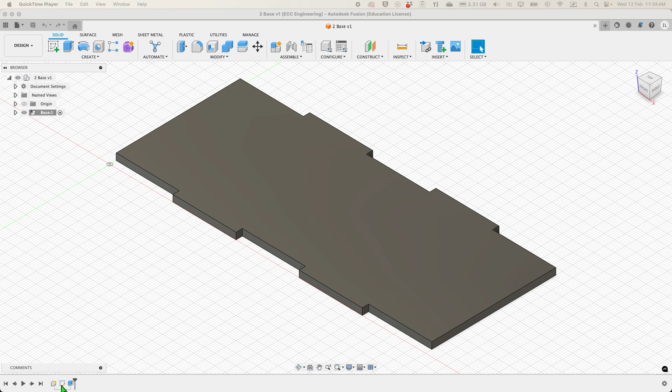But for now, I'm going to put in the drawings in the sketch for a captive nut T-joint, right? So we're not going to create a new sketch because it's going to go on the existing sketch that we have done. So I'm going to go at the bottom here where we have our events, the event browser. Right click on that and click Edit Sketch.

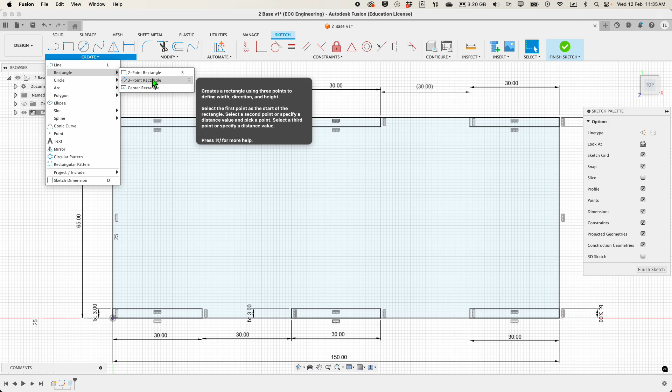And you come back to where we have done our sketch. So the system loads up the sketch onto the window. This looks exactly like what we had done in the previous video. All right, so now we're going to go to Create, and we're going to go Rectangle. And this time around, we're going to choose a 3-point rectangle.

Move the mouse to this edge here and slide along the edge, and the part where it suddenly hits an X with a triangle on it, then you know that it's hit the center. So you're going to click it once and just slide the mouse a little bit across and then type in 3.1. Click once, slide the mouse to the top, and then we're going to type in 8 followed by enter.

All right. So what's happened then is that it has created a rectangle with a height of 8 and the width is 3.1. Why 3.1? Because eventually we're going to put in a bolt that is 3 millimeters in diameter into this opening. And a 3.1 just gives a 0.1 of a tolerance to allow the bolt to go in without scraping against the sides.

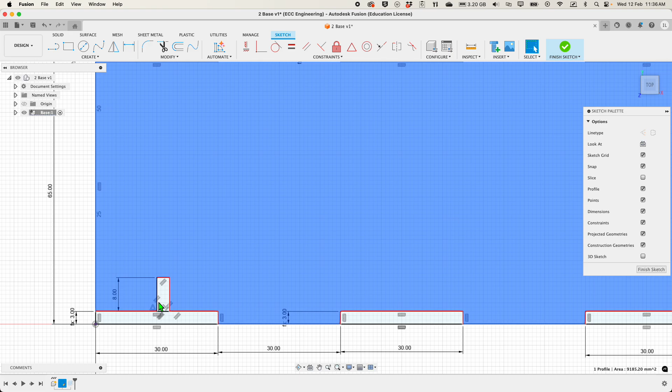All right, I'm going to zoom in now to this section here. And now we're going to create rectangle, and we're now going to do a center rectangle. Right. So again, slide down the top. Now, when you get to the center, again, it shows you with the triangle. Do not click the mouse. Just move the mouse down.

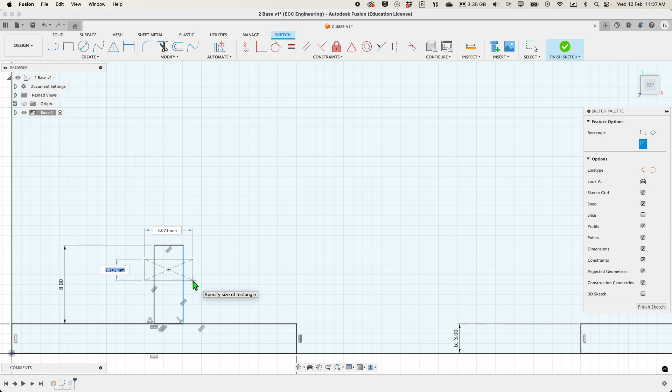So you can see that it is holding the position that it's still at the center, right? You can see the dotted lines come down, but it hasn't quite locked in the position yet. And so we're going to lock in the position just a little bit further down, making sure that the dotted lines are still there. So click once to lock in the position, and then move the mouse out. We're going to type the height as 2.5 and tab, and the width is 5.5, enter. So this is where the nut goes for the captive nut joint.

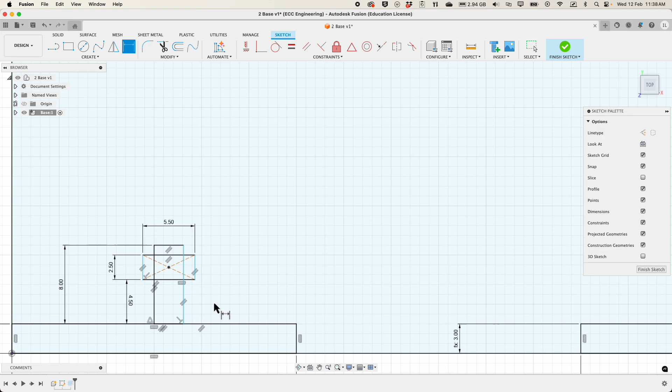Dimension that from the bottom edge to there, and that's going to be a 4.5, enter. All right, we're going to repeat this process again a further 6 times. And I'm probably going to do that really quick just to make things go along a little bit faster.

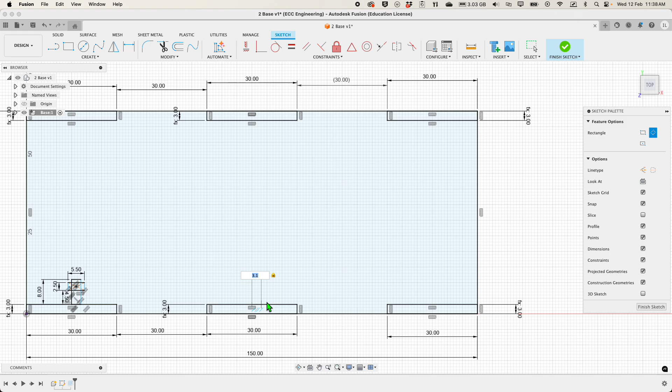Rectangle, 3-point rectangle. I'm just going to slide up to there. Click once. And obviously that's got to be 3.1. Click again. Up 8. Enter. And then we're going to go with create rectangle, center rectangle, and just zooming in a little bit down.

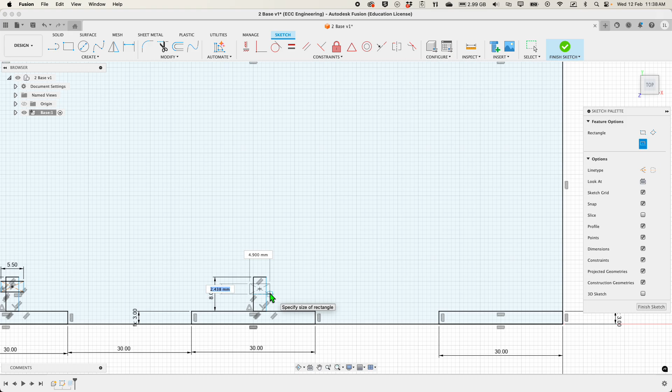2.5, tab, 5.5, enter, and let's dimension that bottom to there, and that's going to be 4.5, enter. Alright, let's repeat that again on this one.

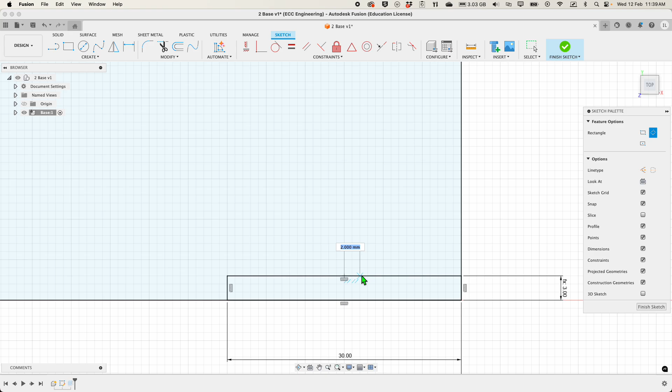Rectangle, 3-point rectangle. Alright, got the center. 3.1. Sliding, oops, that did not go to plan, so I'm going to undo. Repeat that again: create rectangle, 3-point rectangle, center, 3.1, click the mouse once, going up, it's going to be 8, enter.

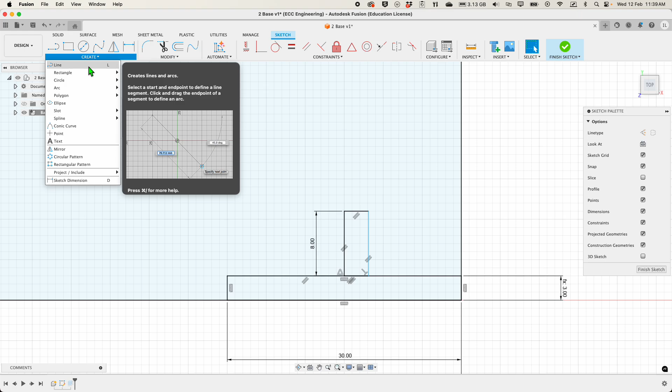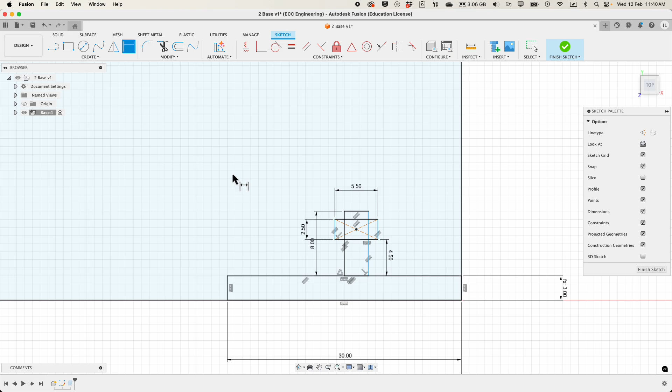Create rectangle, center rectangle, down, 2.5, tab, 5.5, enter. Click, click. I'll put it on this side, so that's going to be 4.5. All right. Escape from there. All right. Now we're going to go up and do the same process up there.

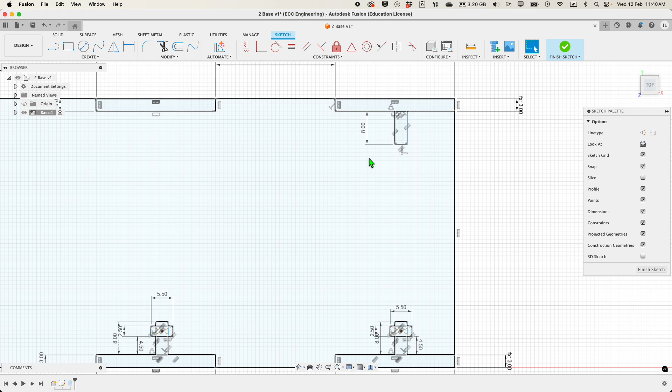Create rectangle, 3-point. Sliding there, getting the center, and going across this way, 3.1. Sliding down to 8. So we got 8. Enter. Create rectangle, center rectangle. Let's find the center, but sliding up this time, and there we go. 2.5, tab, 5.5, enter, and dimensioning that bottom edge to there, and we got to make that 4.5. There we go.

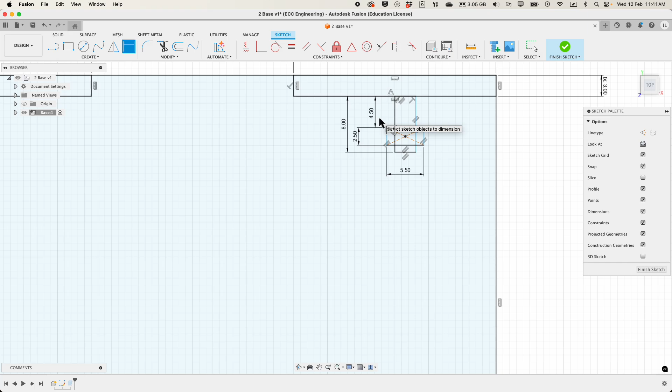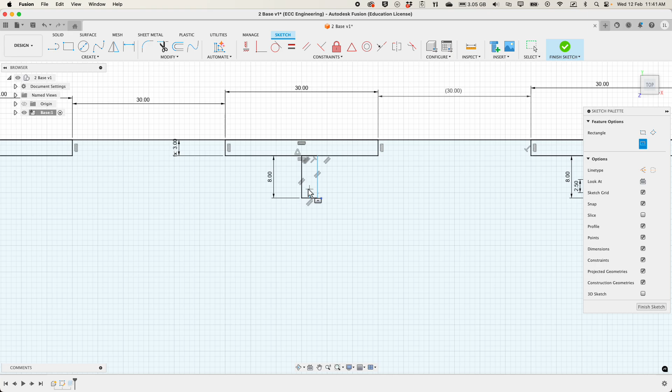All right, repeating the process again. So we need 6 of these. Right, rectangle, 3-point. Now you could probably even use a 2-point to do this, but I'm just choosing to use a 3-point. Just makes it a little bit easier for me, but even a 2-point should do that. All right, oops, gonna be 8, enter. All right. Center rectangle, doing that again. All right, going there. Well, that happened because I clicked the mouse too early, and so it caught onto the wrong part of it.

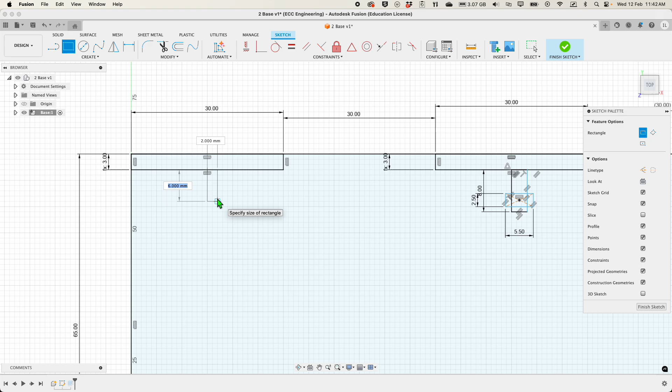All right, so for the last one, I'm going to create this one using a 2-point rectangle. So I'm going to do a 2-point this time. Finding the center, click once, right? And you're going to type in 8, tab, 3.1, enter. Right, creates the same thing, but just with a 2-point rectangle. So you could use either. They both achieve the same thing.

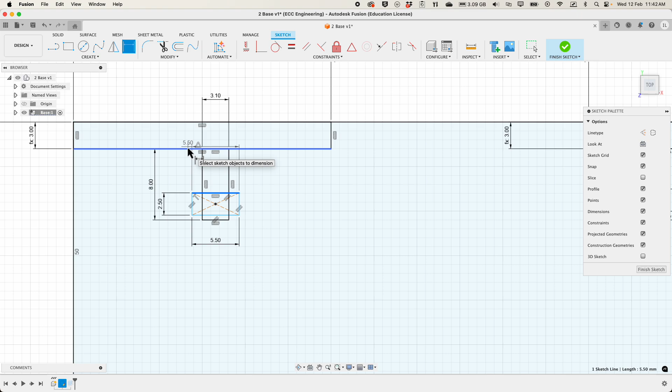All right, finding the center, there we go. Going in a little bit. 2.5, tab, 5.5, enter. And dimensioning the edge to there. And we're going to make that 4.5. There we go. All right, escape to come out of the dimensioning mode.

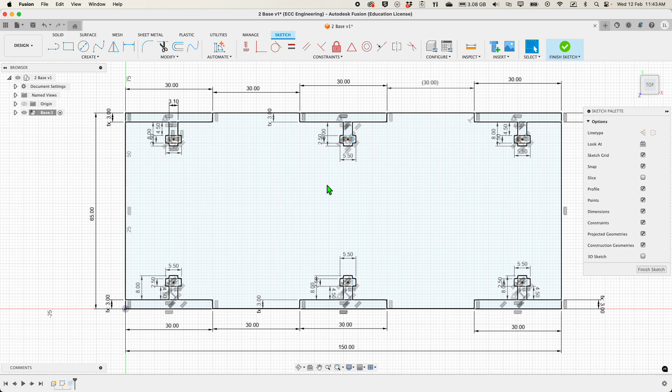I'm going to zoom out just to be able to show all those that I have done. And you look and you can find that they are actually in line, right? From the top to the bottom, they're all in line. They're all in the exact locations on either side. And hit finish sketch. Now at this point in time, you're puzzled as to, oh my goodness, I've done the sketches, but it's not appearing in the object. So that's because we have extruded those portions as well.

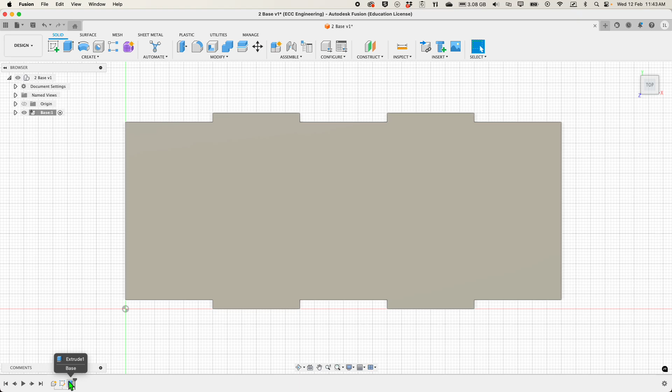So let's go back to the extrusion icon right at the bottom. We're going to right click and then go on to edit feature. And here you can see those sketches that we have done, but they're being extruded as well. So click all of them so that they are not going to get built up, right? And this tells Fusion that you don't want these portions extruded.

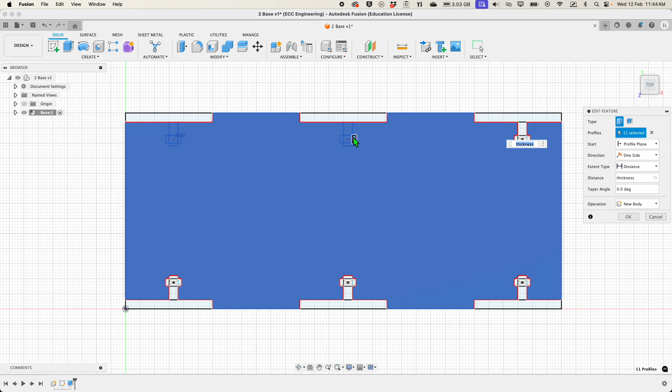So there's 6 of them, so I need to click all of them, and there we go. They've all been deselected, and then click OK. And look at that. So I'm going to click on Home, and you can see your captive nut joints coming into shape. We obviously have to build a bolt and all that to show how it is in totality, but for now this is the portion that's there.

All right, again, save your work. You can save it with a different file name, or you can save it with the same one as well.